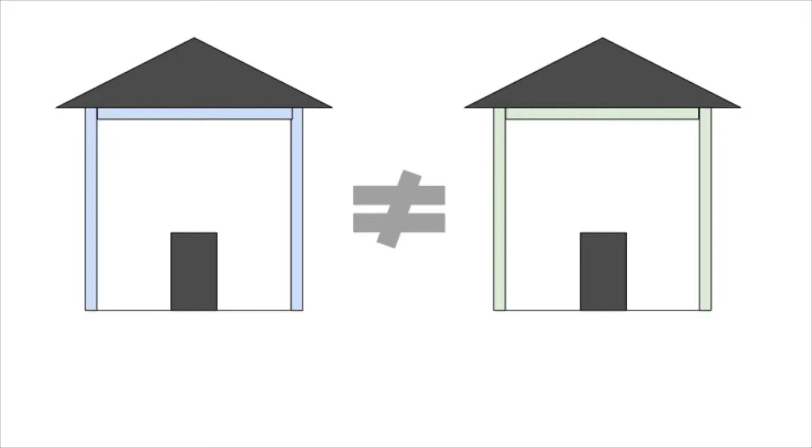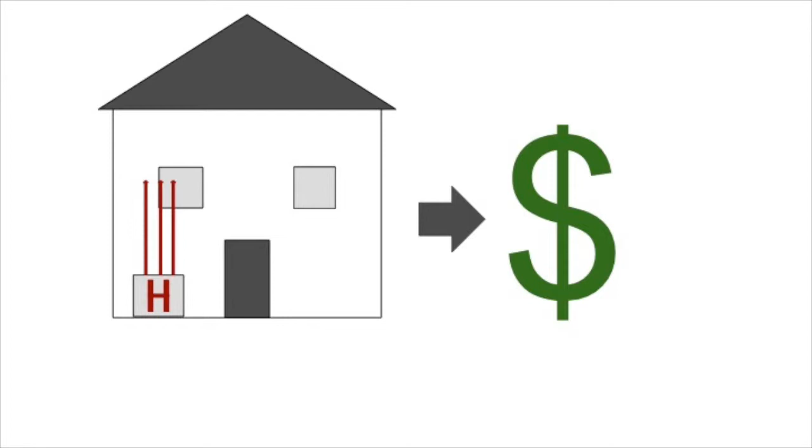Insulation is a very important aspect of any building, especially in an environment such as New England, which experiences extreme temperature variations every year. Insulation is not only important for human comfort, however. Better insulation leads to less need for heating or cooling a building, which helps save resources such as oil or gas, and also helps people save money.

According to the Massachusetts Department of Energy and Environmental Affairs, oil prices in 2014 reached a high of $4.67 per gallon. In temperatures which may fall even below zero, proper insulation may be the difference of hundreds of dollars per year spent on heating alone.

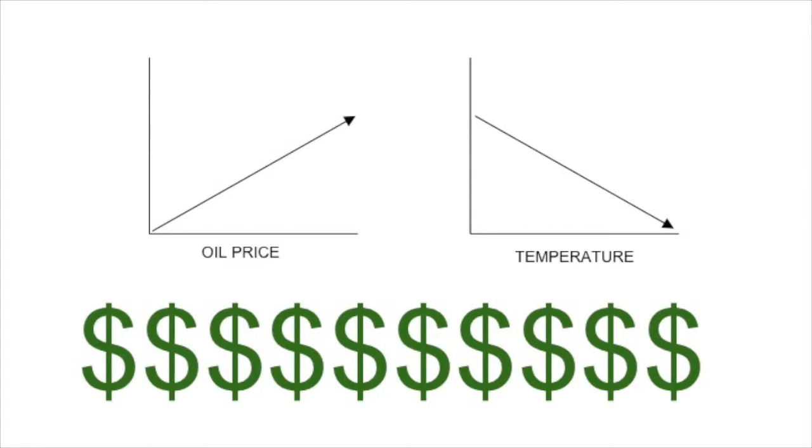Replacing insulation in every wall of a building can be a daunting task and may not be right for everyone. Fortunately, it doesn't need to be all or nothing. As most people know, hot air rises. In buildings, this translates into most heat escaping through the roof.

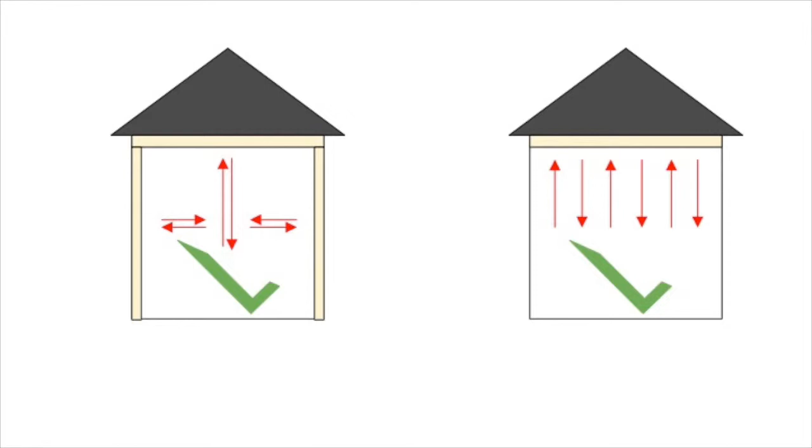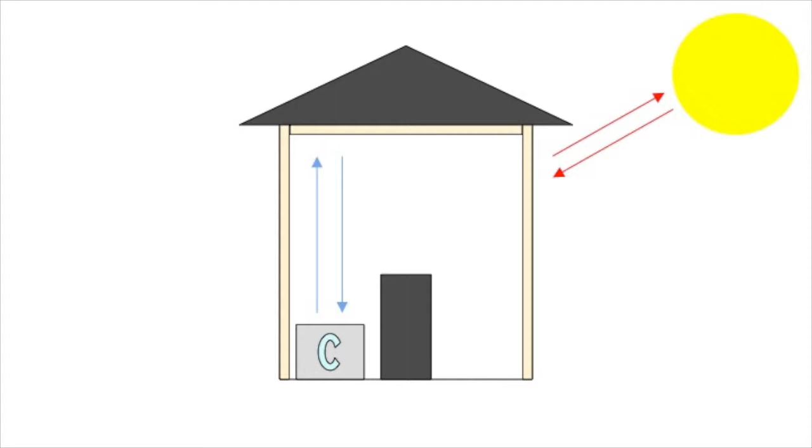If replacing the insulation throughout an entire building is not an option, filling in the attic with insulation can still have a big impact. Insulation is most known for trapping heat inside a building, but it can be just as helpful during the summer. It can also trap heat out of a building, and keep cool air from air conditioning or overnight air temperature changes from escaping.

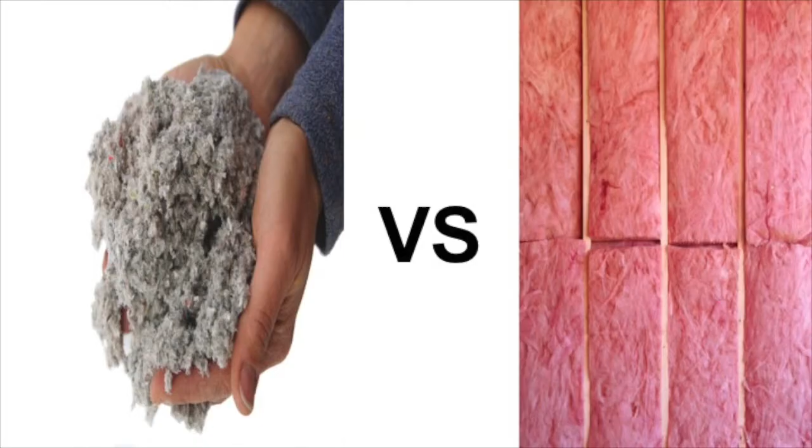Insulation makes a little bit of heating or cooling go a long way. If used effectively on a large scale, it may have massive impacts on the rate of depletion for important finite resources. In the rest of this video, we will discuss the qualities and sustainability of two common insulation materials: cellulose and fiberglass. Insulation's resistance to conductive heat flow is explained by its R value.

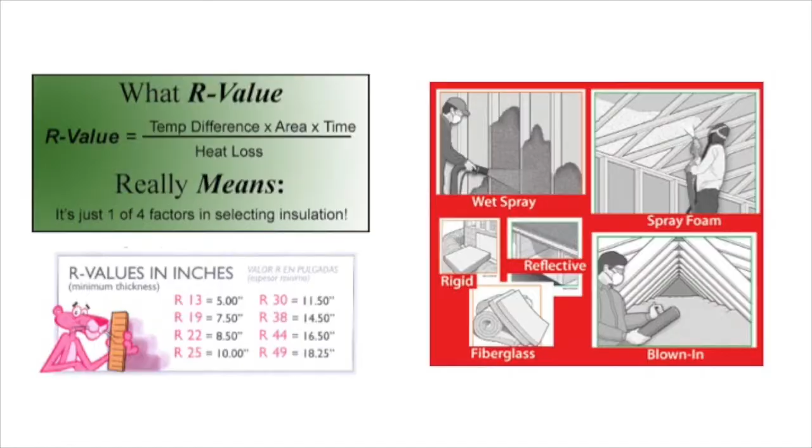The greater the R value, the greater the insulation effectiveness. R value may depend on the type of insulation, its thickness, and its density. Cellulose, an insulation material made from recycled newspaper and some added chemicals, has an R value of 3.2 to 3.8 per inch.

Cellulose has a fairly low embodied energy, which is the amount of energy used from the production of a product to its disposal. This is due to the recycled materials used in its production and the fact that it can be recovered and reused during the installation process. As a result, almost no excess materials return to the waste stream.

Cellulose can easily be made flame retardant with the addition of borates and tends to be very successful in managing extreme cold temperature situations. The average cost of blow-in cellulose insulation ranges between 77 cents and $1.27 per square foot.

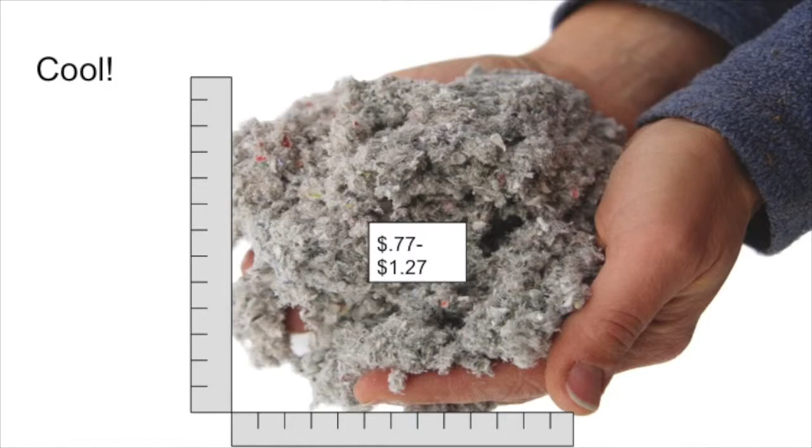There are only two potential negatives to cellulose as an insulation method. Cellulose must be installed by a professional, and it frequently must be replaced every 5 years due to compaction when moist. One other common insulation material is fiberglass.

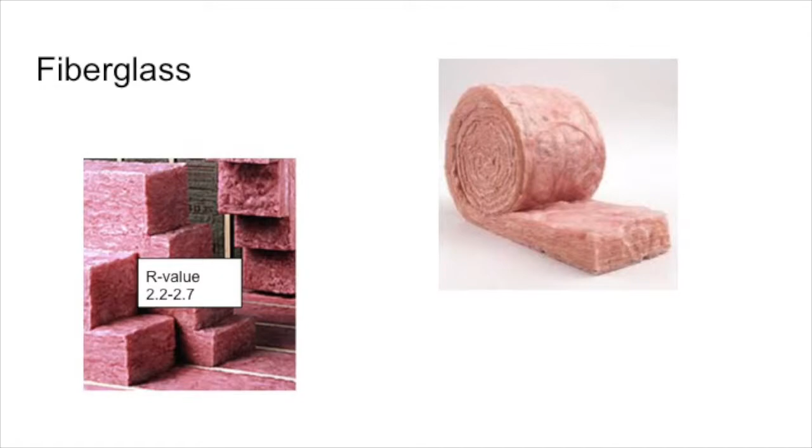As an average, fiberglass has a lower R value than cellulose, at an approximate range of 2.2 to 2.7 per inch. In general, fiberglass has a higher R value when compressed. Fiberglass does not need to be as densely packed to provide adequate insulation, and therefore doesn't require as much material. However, fiberglass which is densely packed has the potential to have an R value as high as 4.

Fiberglass is also flame retardant, and it often contains 20 to 30% recycled glass. Fiberglass costs almost identical to cellulose, at about 70 cents to $1.21 per square foot. One benefit of fiberglass as insulation is that it does not need to be installed by a professional, so it may be a less intrusive process to implement and cost the homeowner less in installation fees.

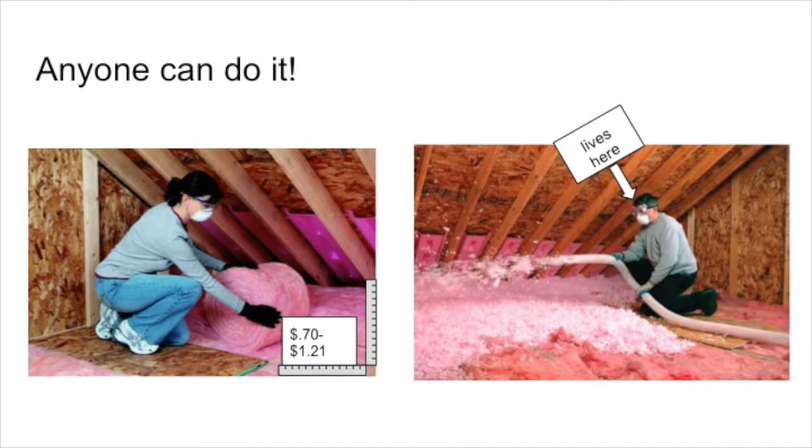Just make sure you have the right tools and know what you're doing. A poor installation job may lead to degraded insulation value. You may choose to pay for a proper installation job now instead of paying for escaped heat later.

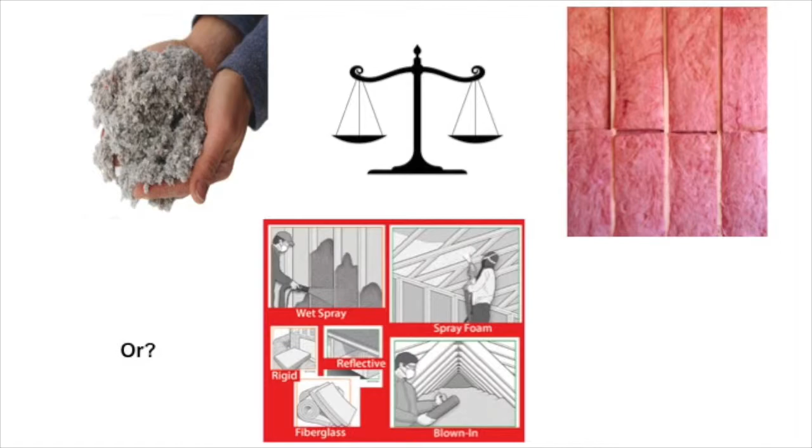There are definitely both positives and negatives to using fiberglass or cellulose, as well as other insulation materials we did not discuss. Ultimately, it is your choice to decide what best suits your lifestyle and ability for time or effort investments. Cellulose does insulate better in most cases, but fiberglass is far from useless.

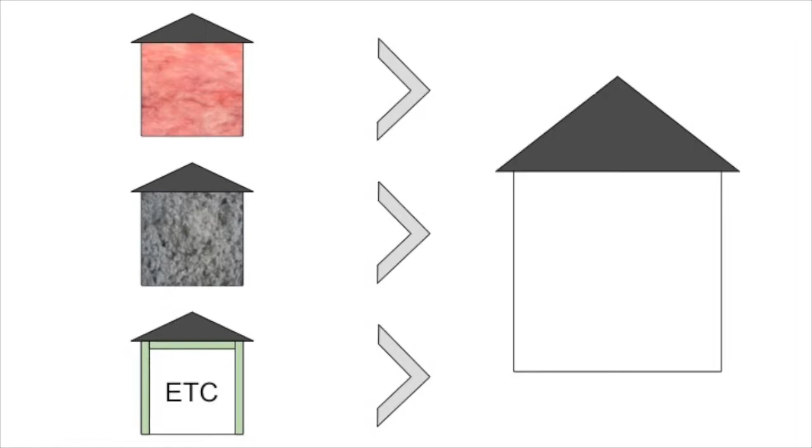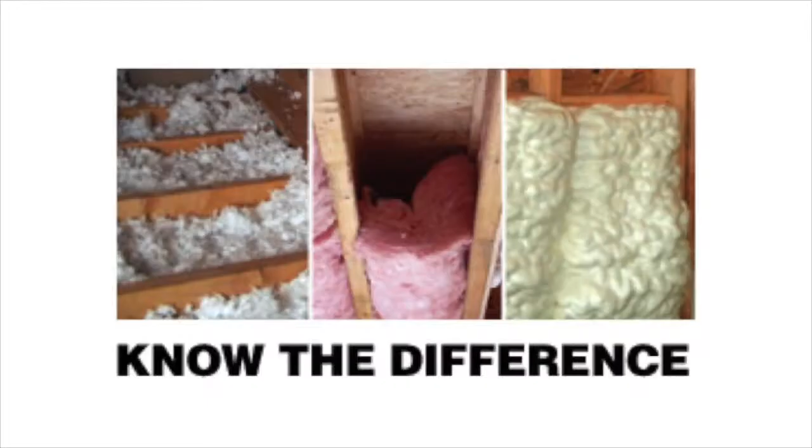What is most important is having something insulating your home and putting thought into what is working or might work better. If you don't want strangers all around your house installing cellulose, it still works wonders in the attic. If you wish fiberglass would insulate better, you can look into different concentrations and densities and how they work better or worse in different environments.

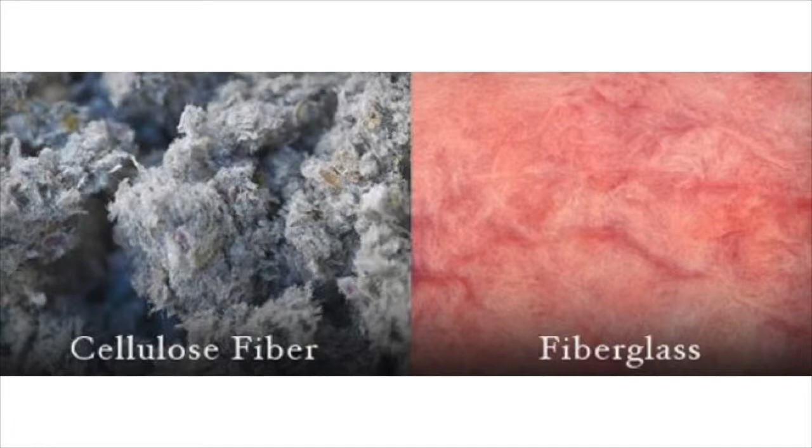Installing insulation in your home does make a difference. There's only so much more energy we'll have the resources to create. Intentional use of insulation can help keep you comfortable during the varying New England seasons, and make sure there will be energy left to keep you comfortable next year, too.